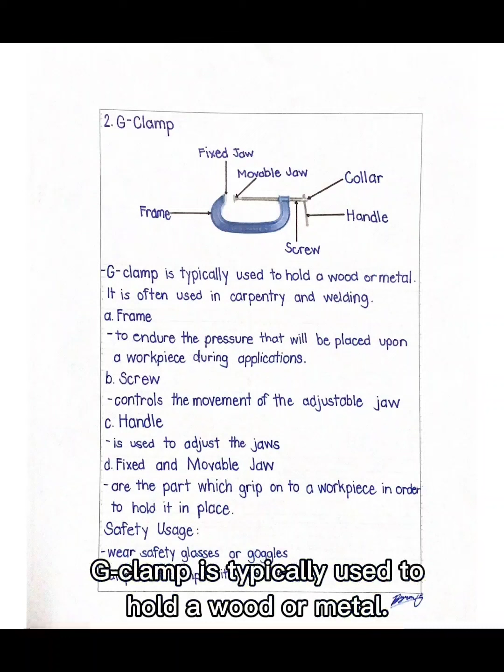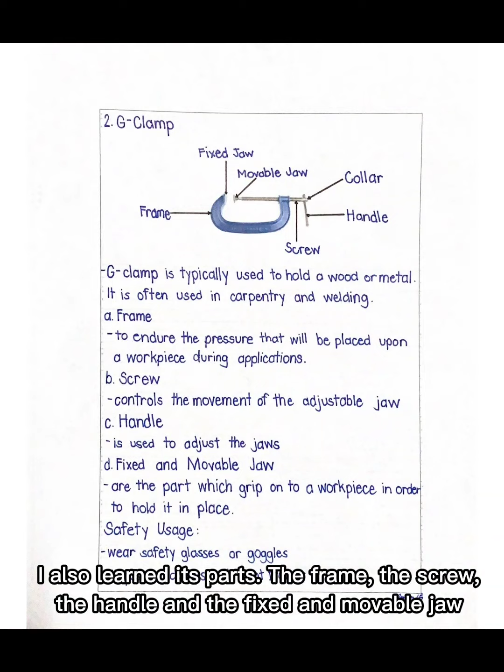The first thing that I learned is the G-clamp. A G-clamp is typically used to hold wood or metal, and it is often used in carpentry and welding. I also learned its parts: the frame, the screw, the handle, the fixed and movable jaw, as well as its safety usage.

The next one is the bench vise. A bench vise is a tool used to secure an object that is to be worked on. Its parts are the screw to tighten the handle, the base that holds part of the bench vise, the jaws where you place the object, and the handle that acts as the lever that turns the screw.

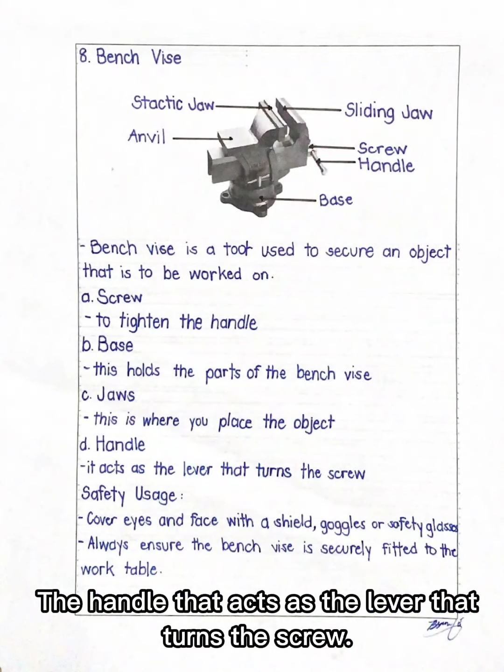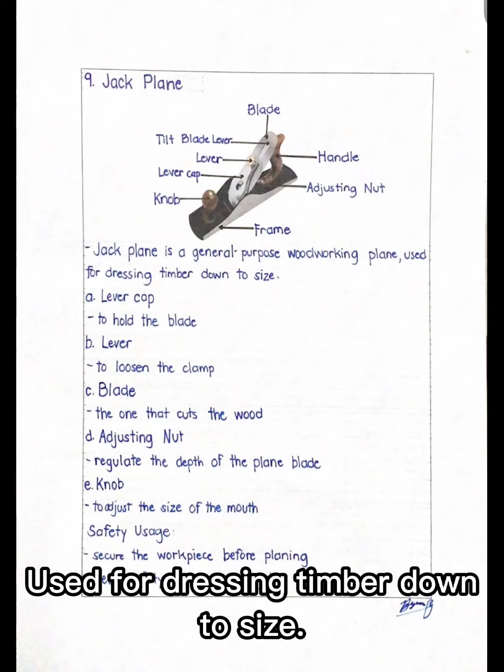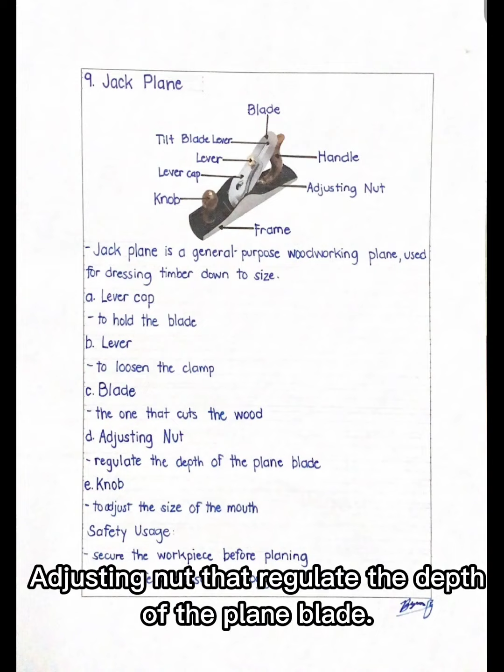The third one is the jack plane. A jack plane is a general purpose woodworking plane used for dressing timber down to size. Its parts are the lever cap to hold the blade, the lever to loosen the clamp, the blade that cuts the wood, the adjusting nut that regulates the depth of the plane blade, and the knob to adjust the size of the mouth.

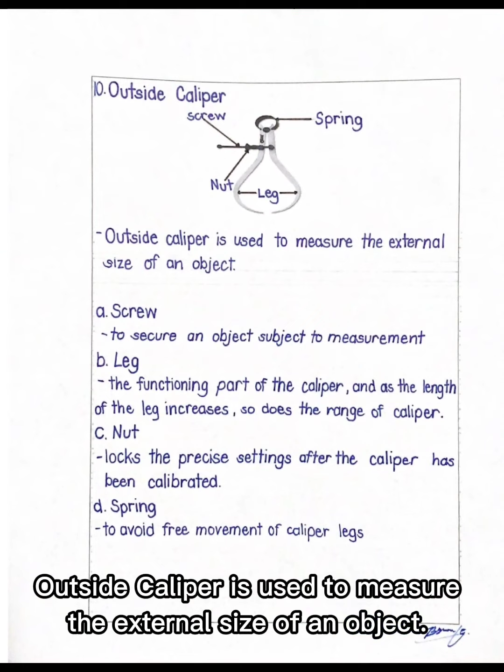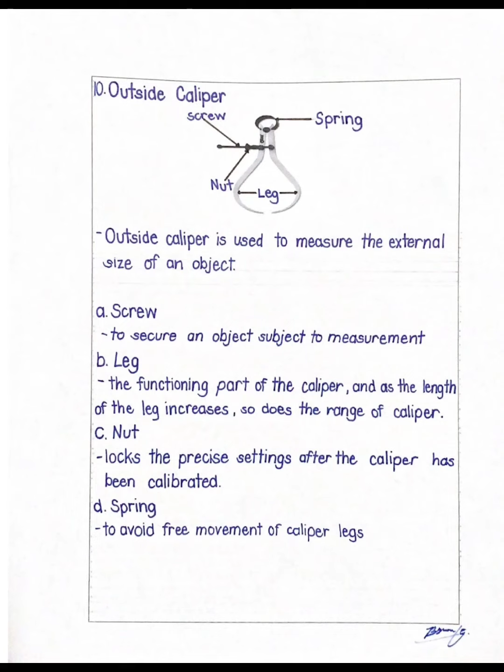The next one is the outside caliper. It is used to measure the external size of an object. Its parts are the screw to secure an object subject to measurement, the leg, the functioning part of the caliper, the nut that locks the precise settings after the caliper has been calibrated, and the spring to avoid free movement of the caliper legs.

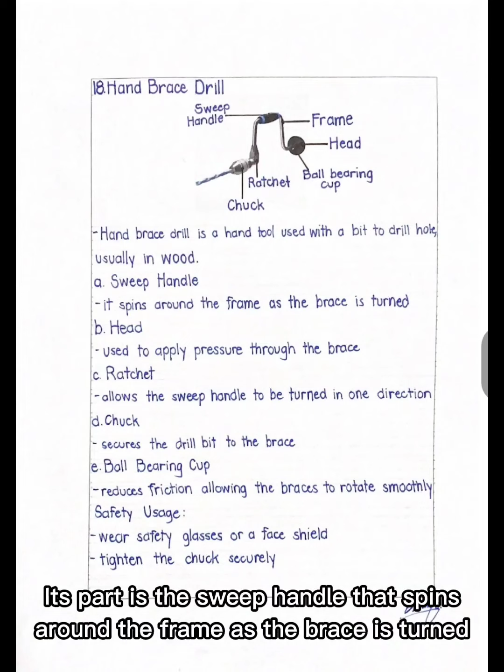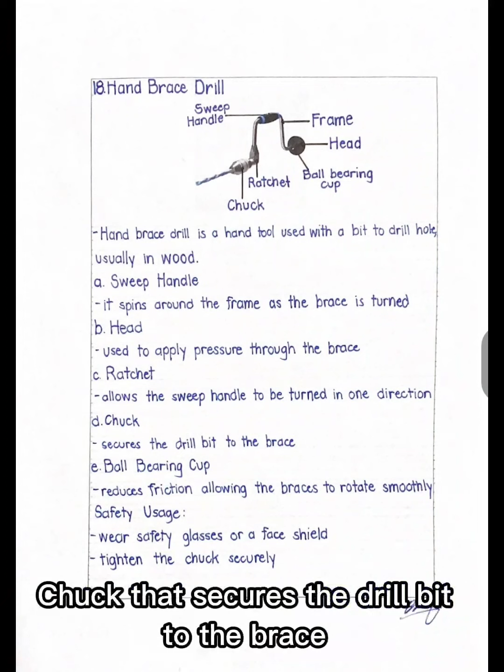The next one is the hand brace drill, a hand tool used with a bit to drill holes, usually in wood. Its parts are the sweep handle that spins around the frame as the brace is turned, the head used to apply pressure through the brace, the ratchet that allows the sweep handle to be turned in one direction, the chuck that secures a drill bit to the brace, and the ball bearing cup that reduces friction, allowing the brace to rotate smoothly.

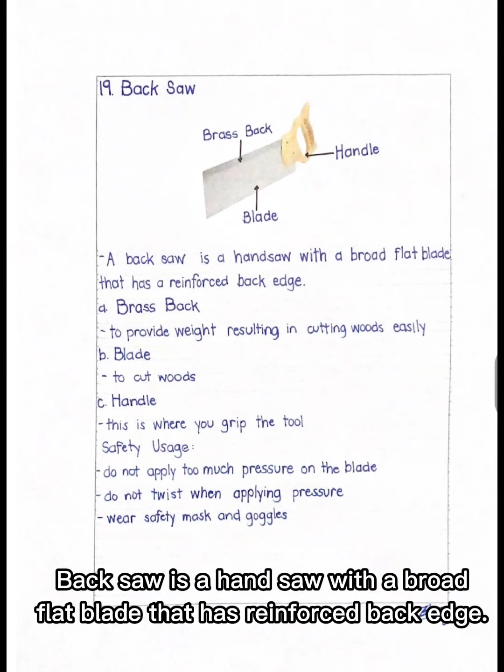The next one is the backsaw, a handsaw with a broad flat blade that has a reinforced back edge. Its parts are the brass back that provides weight, resulting in cutting wood easily, the blade to cut the wood, and the handle where you grip the tool.

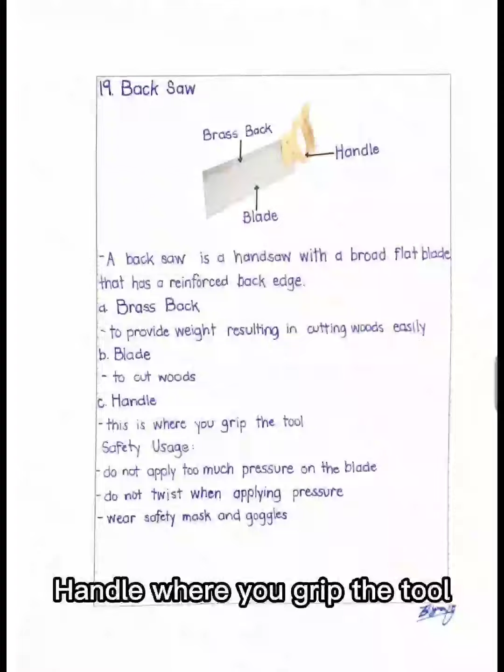The next one is the compass saw, designed for cutting curves or working in awkward and confined spaces. Its parts are the blade that cuts through the material, the handle where you hold the tool, as well as its safety usage.

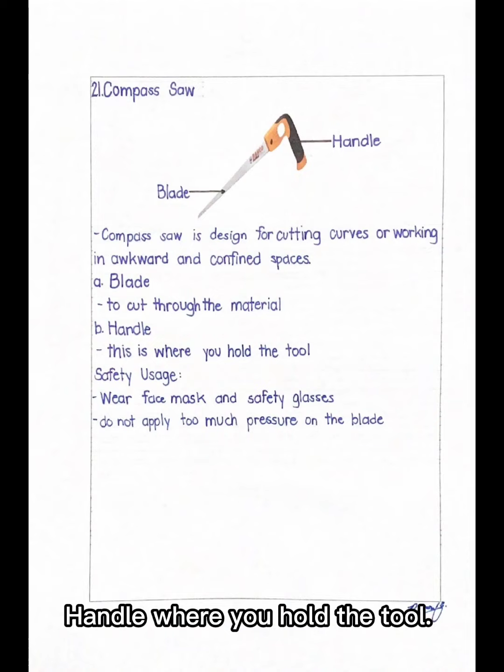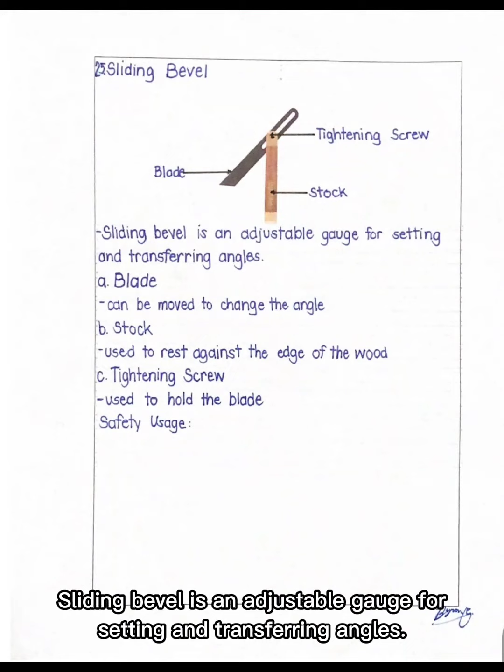The next one is the sliding bevel, an adjustable gauge for setting and transferring angles. Its parts are the blade that can move to change the angle, the stock used to rest against the edge of the wood, and the tightening screw used to hold the blade.

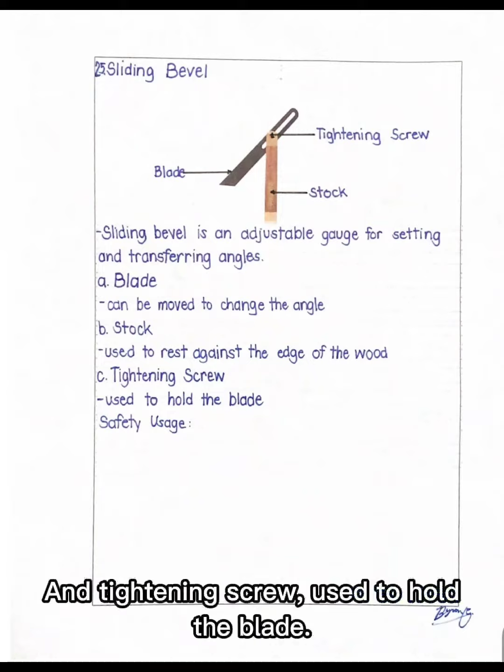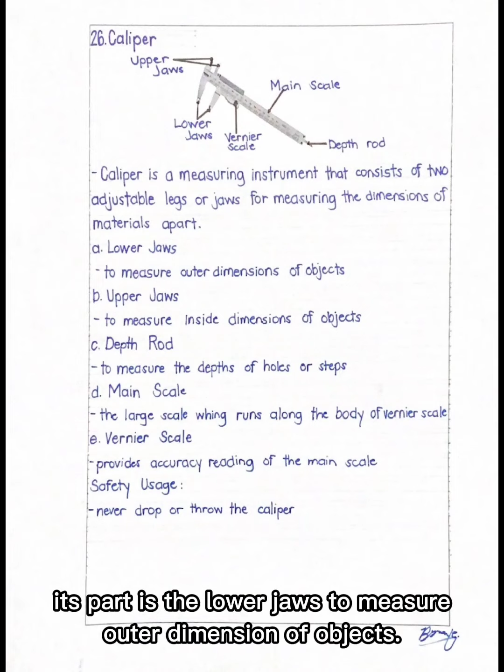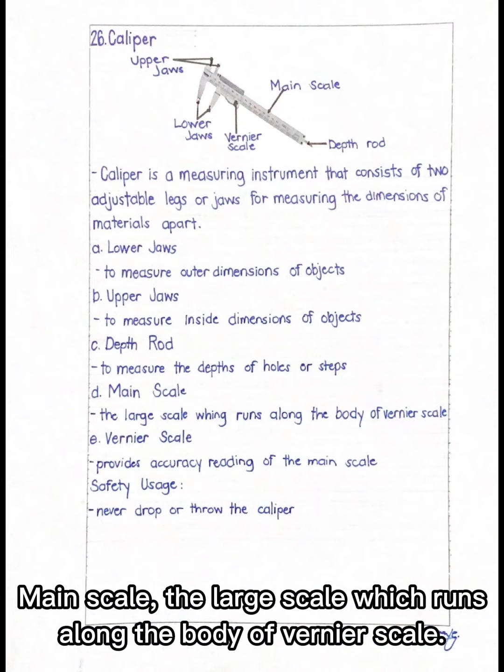The next one is the caliper, a measuring instrument that consists of two adjustable legs or jaws for measuring the dimensions of materials apart. Its parts are the lower jaws to measure outer dimensions of objects, the upper jaws to measure inside dimensions of objects, the depth rod to measure the depths of holes or steps, the main scale, the large scale which runs along the body, and the vernier scale, which provides an accurate reading of the main scale.

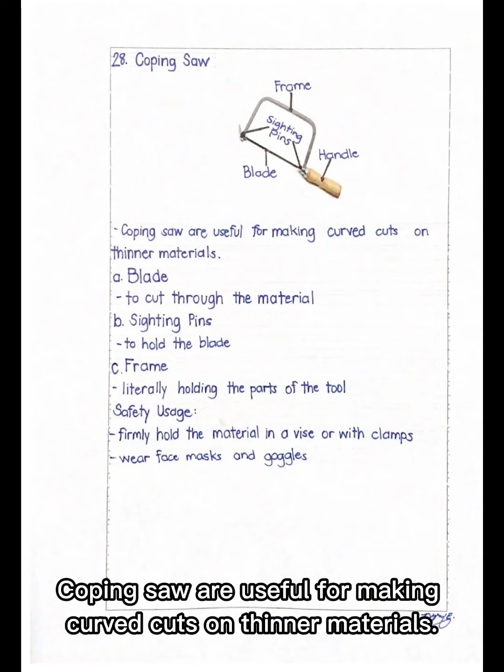The next one is the coping saw, useful for making curved cuts on thinner materials. Its parts are the blade to cut through the material, the sighting pins to hold the blade, and the frame that literally holds the parts of the tool.

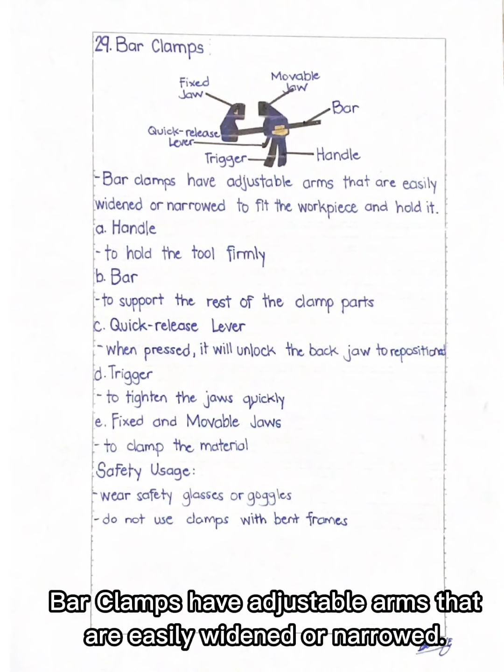The next one is the bar clamps. Bar clamps have adjustable arms that are easily widened or narrowed to fit the workpiece and hold it.

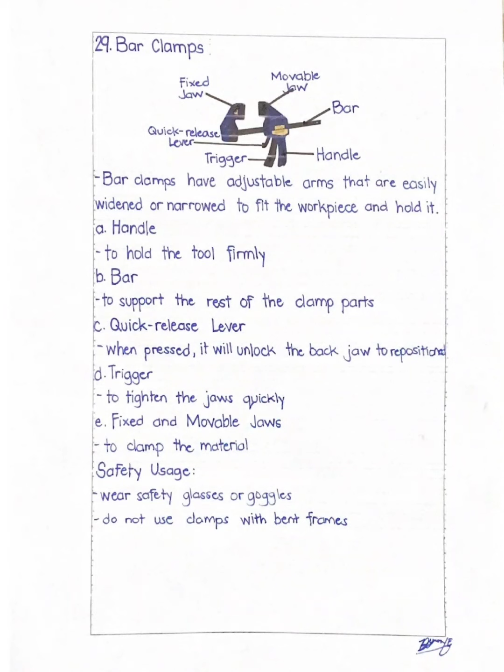Its parts are the handle to hold the tool firmly, the bar to support the rest of the clamp parts, the quick release lever which when pressed unlocks the back jaw to reposition, the trigger to tighten the jaws quickly, and the fixed and movable jaws to clamp the material.

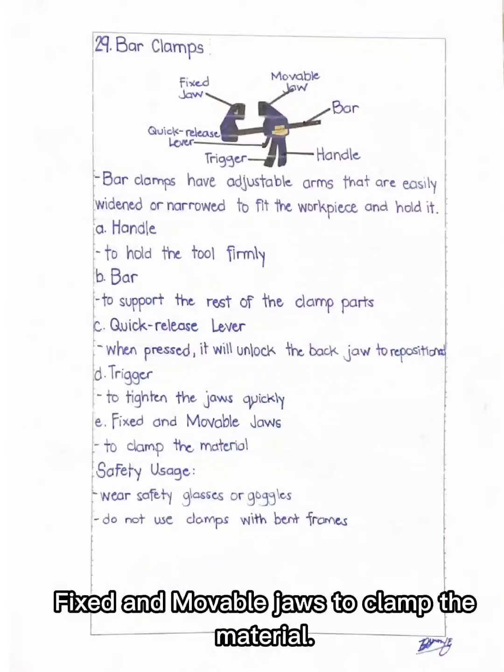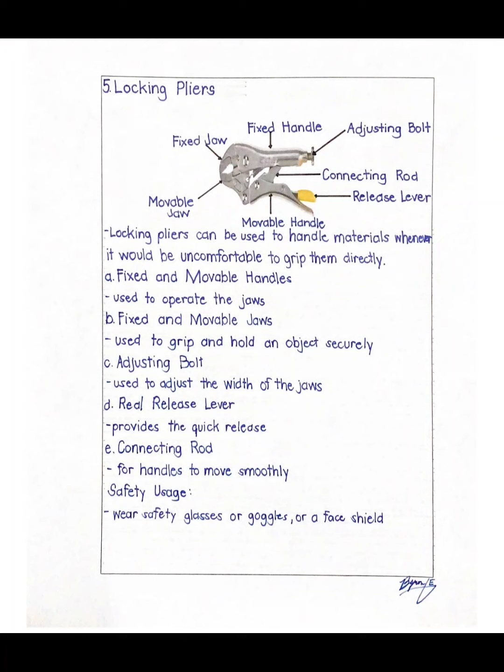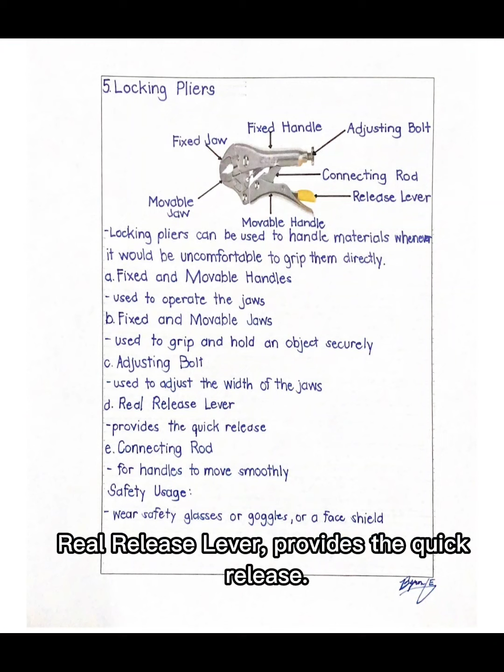Its parts are the fixed and movable handles that operate the jaws, the fixed and movable jaws used to grip and hold an object securely, the adjusting bolt used to adjust the width of the jaws, the real release lever which provides a quick release, and the connecting rod for handles to move smoothly.

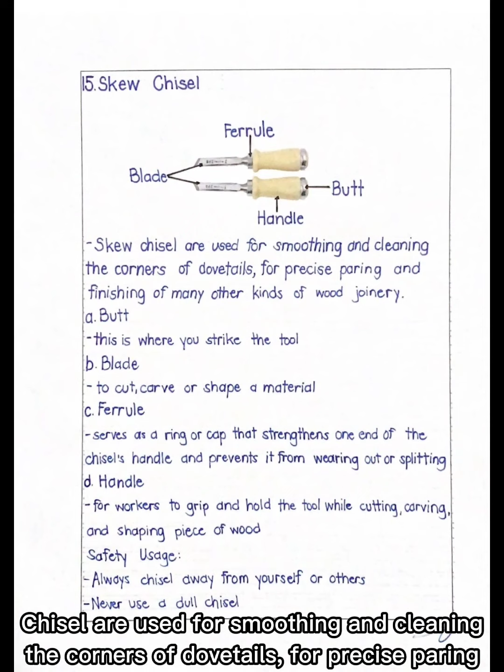The next one is the chisel. Chisels are used for smoothing and cleaning the corners of dovetails, for precise paring and finishing of many other kinds of wood joinery.

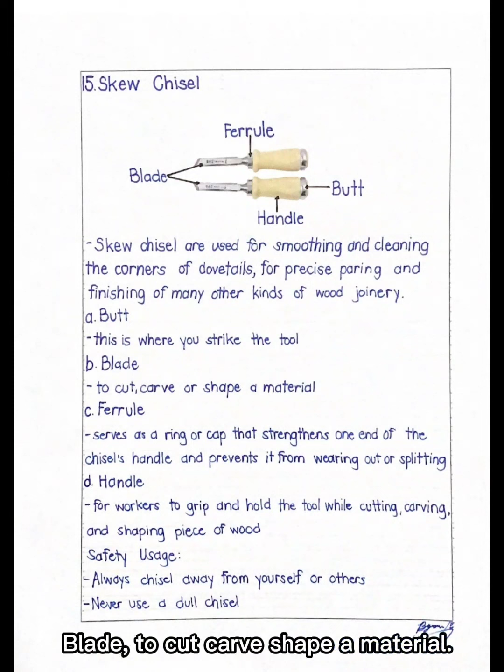Its parts are the butt where you strike the tool, the blade to cut, carve or shape a material, and the ferrule which serves as a ring or cap that strengthens one end of the chisel's handle and prevents it from wearing out or splitting.

The handle is for workers to grip and hold the tool while cutting, carving, and shaping a piece of wood.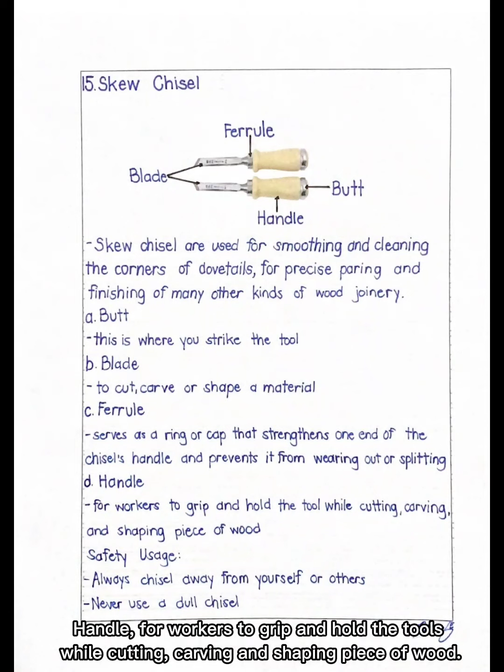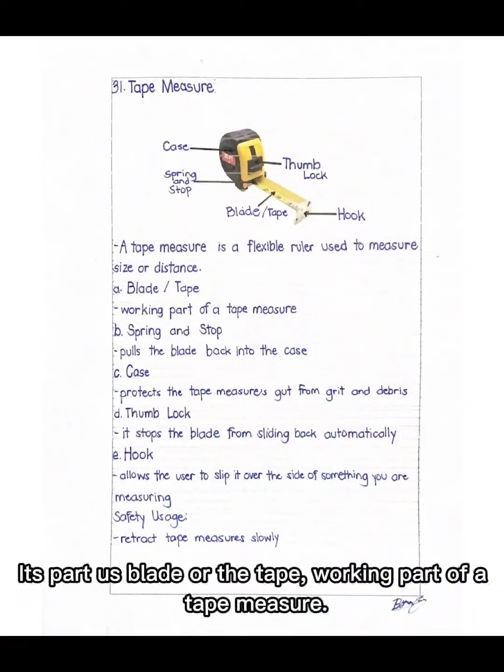Next is the tape measure. A tape measure is a flexible ruler used to measure size or distance. Its parts are the blade or tape, the working part of a tape measure.

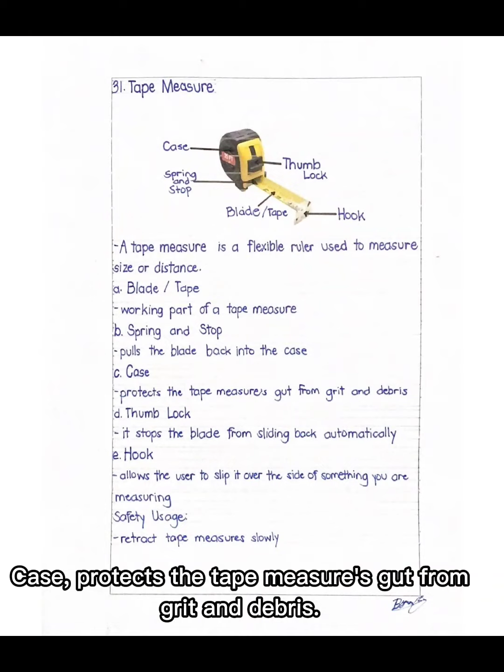The spring and stop pulls the blade back into the case. The case protects the tape measure's gut from grit and debris. The thumb lock stops the blade from sliding back automatically. And last is the hook, which allows the user to slip it over the side of something being measured.

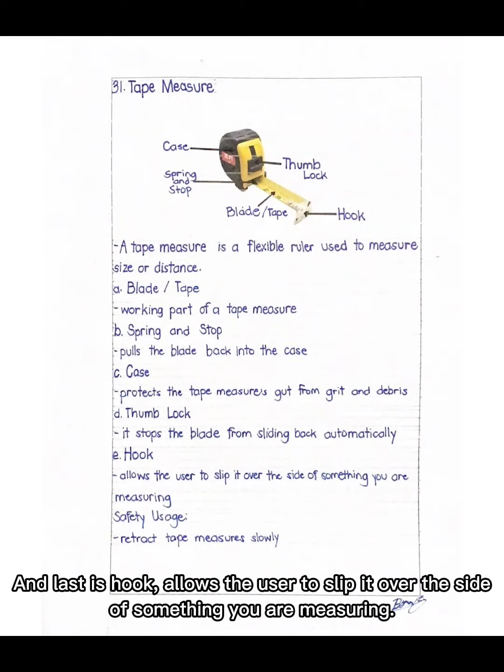The next one is the Phillips screwdriver. Phillips screwdrivers are used for insertion and removal of screws.

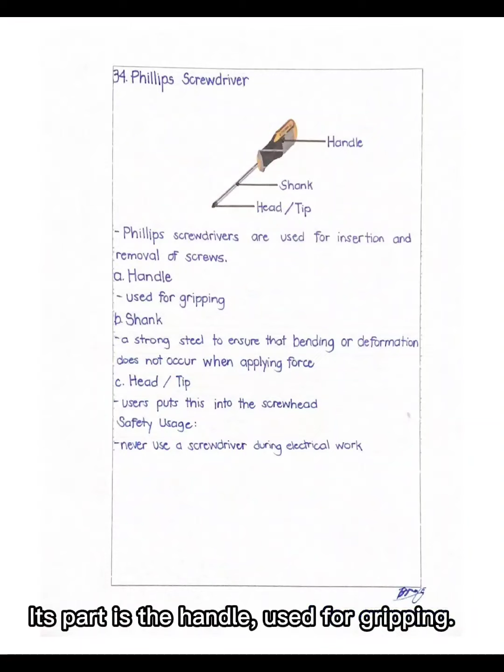Its parts are the handle used for gripping, the shank, a strong steel that ensures bending or deformation does not occur when applying force, and the head or tip, which users put into the screw head.

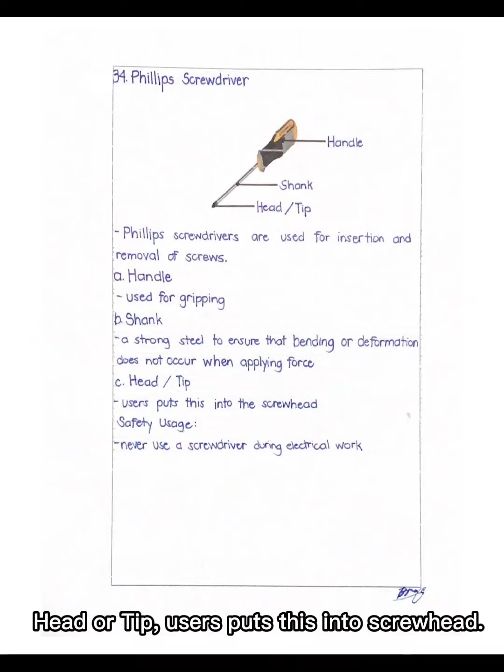The next one is the center punch. A center punch consists of a short steel bar with a hardened conical point at one end, used for marking the centers of holes to be drilled.

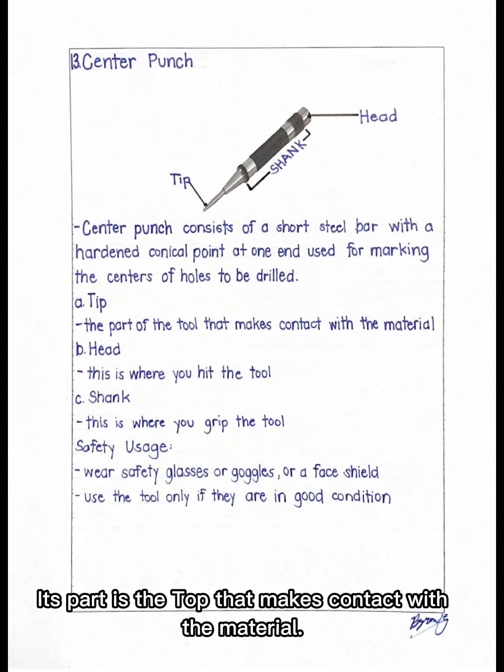Its parts are the tip that makes contact with the material, the head where you hit the tool, and the shank where you grip the tool. Last but not least is the combination square.

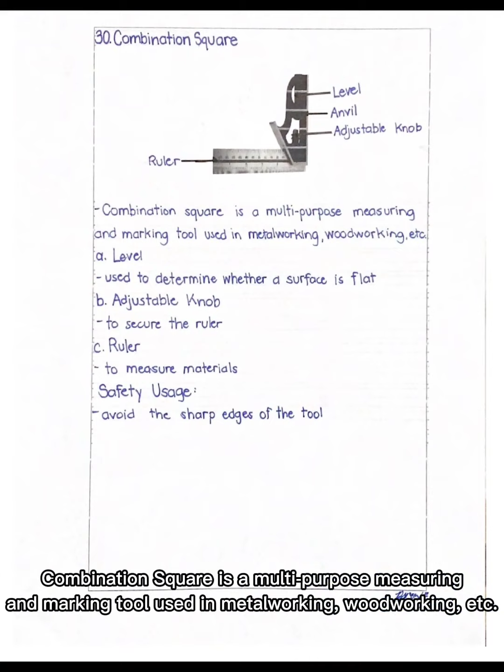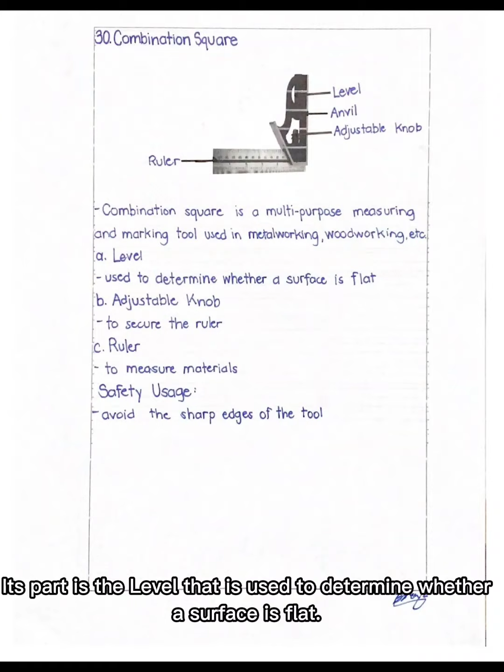A combination square is a multi-purpose measuring and marking tool used in metalworking, woodworking, etc. Its parts are the level, used to determine whether a surface is flat, the adjustable knob to secure the ruler, and the ruler to measure the materials.

Remember, safety first. Our safety is our number one priority before and while using these various kinds of tools. It could be dangerous to us physically if we are not careful enough when using tools that may inflict damage and pain to our body.

Apart from these tools, I also learned how to draw and visualize different perspectives of an object.

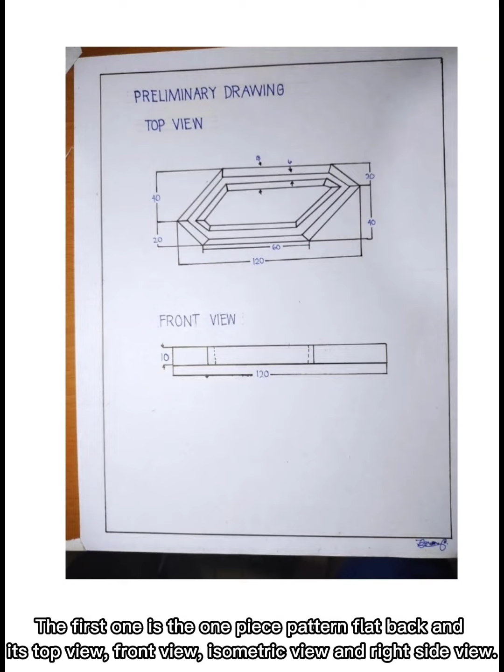These are the drawings that I created during this course. The first one is the one-piece pattern flat back, shown with its top view, front view, isometric view, and right side view.

The second one is what we call the two-piece pattern link, with its front, top, right side, and isometric views. And the third drawing is the rocker arm.

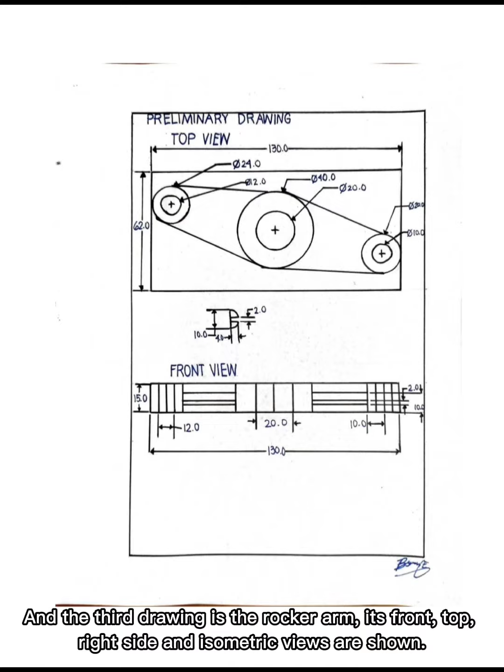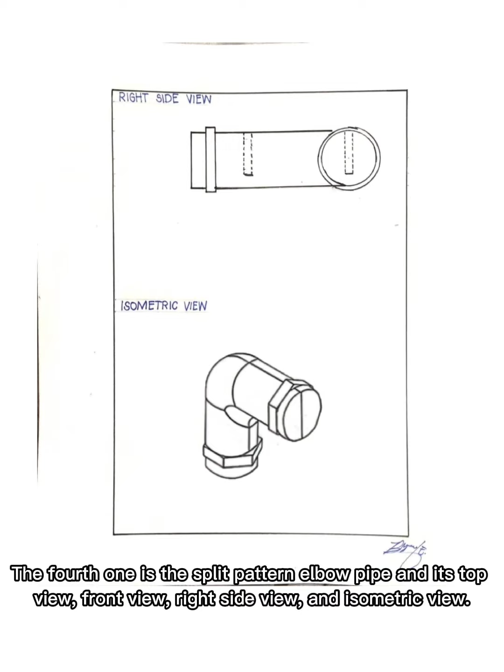Its front, top, right side, and isometric views are shown. The fourth one is the split pattern elbow pipe, with its top view, front view, right side view, and isometric view.

And lastly, the three-piece pattern machine guide, with its front view, top view, right side view, and isometric views.